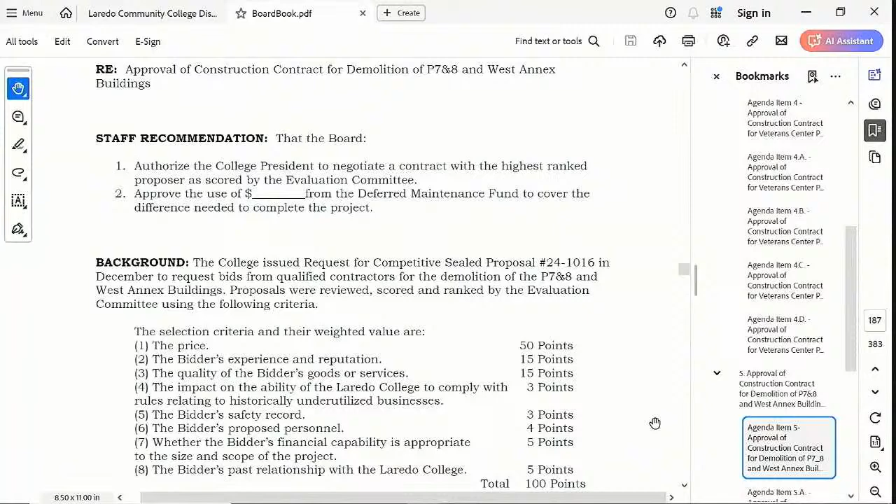In the agenda item, you have the criteria that was used to evaluate the proposals. The funding for the project, this is not a grant fund, this is a deferred maintenance project. We had initially budgeted 250,000 for the project, so both proposals came over that budget, so we will need to request additional funding from the deferred maintenance.

Depending on which one is selected, depending on which proposal is approved by the board.

Okay, but we will see those amounts tomorrow? Yes, yes, okay.

Any questions, Mr. Rangel? No, I was gonna ask about the funding, but Cesar actually covered it, thank you. Ms. Newsom? Dr. Ramirez? No, ma'am.

Thank you. Okay, then we'll move on to item number 6, construction projects update. Mr. Homer Paez and Mr. Huicho Tijerina.

Good evening, building committee members. I know some of you are new to the committee, so we normally come to you every 2 months with updates on all the projects going on at both campuses, the main Fort McIntosh and the South Campus. So today I'll go through all of the projects we currently have going on and give you a quick update, get you a little more familiar with everything on our drawing board right now.

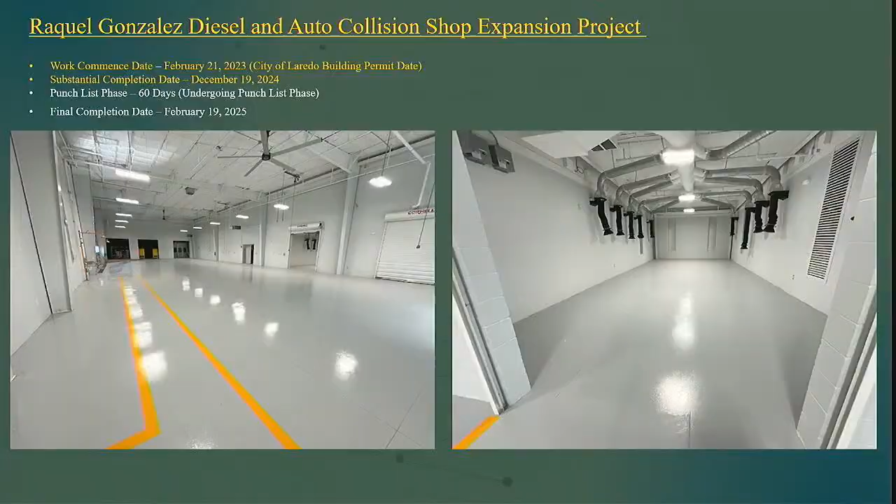Some of the new spaces showing you the overhead doors of both the auto collision and the diesel shop.

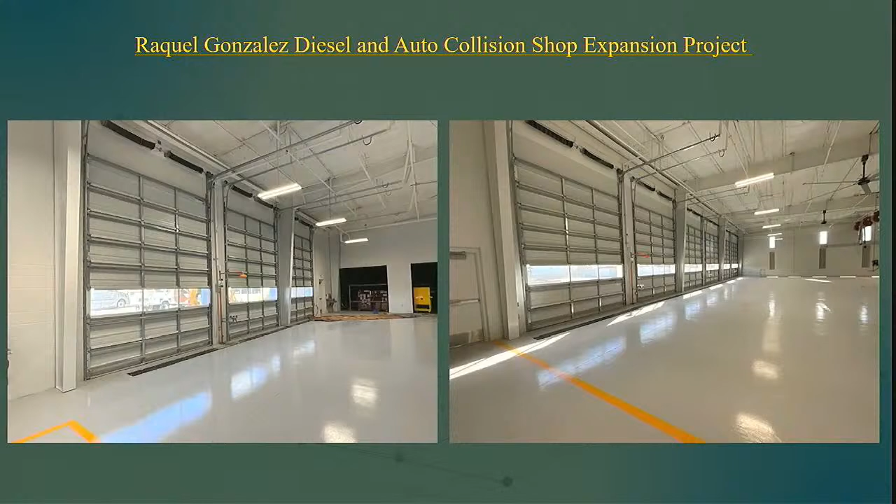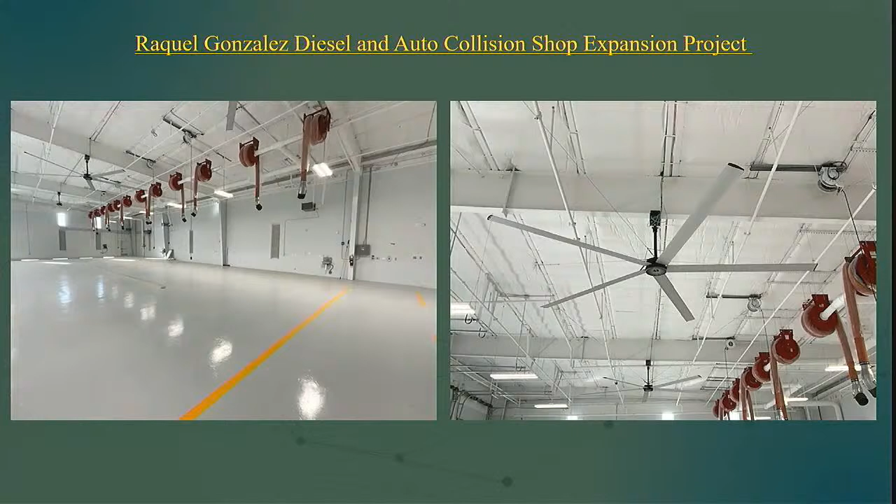Some of the services that have been installed as part of the scope of work: exhaust hoses and service reels for power, the large ceiling fans for air circulation. The floors were recently painted with epoxy finish as part of the scope of work.

So as you can see, some of these materials we've now used have become pretty standard for the college now. We're tending to stick to neutral colors, and this will become our standard for any renovations or new facilities that may come on board eventually later on.

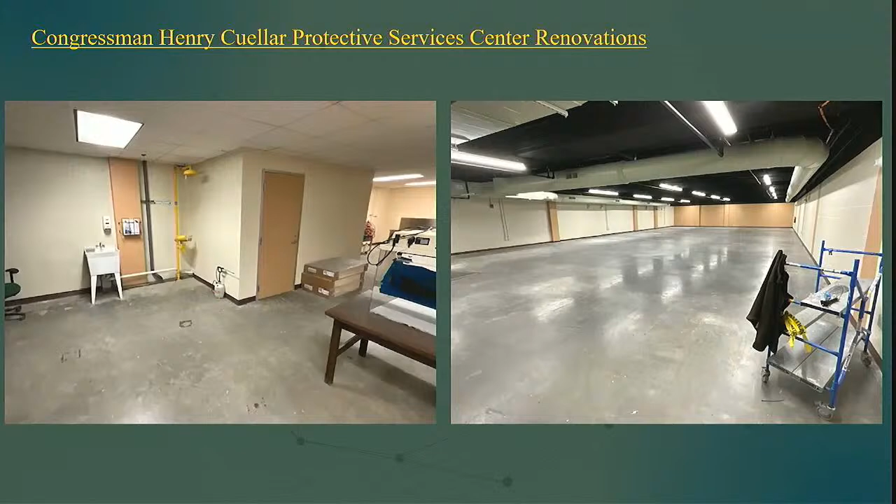These are some of the interior spaces that we renovated inside the building. A new office for the director of the program, with an adjacent conference room.

Here at Fort McIntosh, we have now completed the MFA HVAC chill water plant upgrade for three different facilities covering the LEAC, the MFA, and the VPA. Currently, the contractor is working on gathering all of his as-built documents and warranty documents to turn them over to the college and to plant facilities for their record.

We've had a few warranty items come up, and they've attended to all of them - all have been completed. The one remaining thing they're going to come back and check is the test and balance of the facility, to check the flow of air in each of these buildings. We'll have a final report included in the final closing documents.

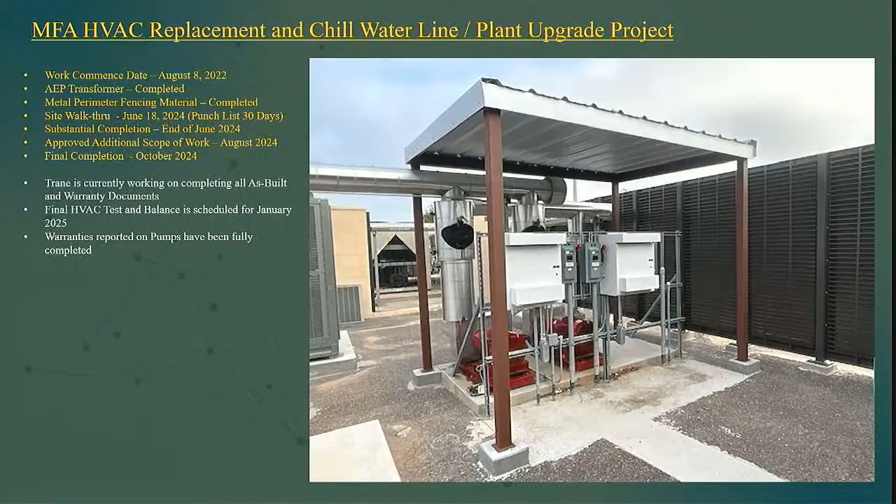The Lamar Bruni Vergara project, which we talked a little bit about the extension earlier - the formal letters are attached there for your viewing. If we do get the extension, we will have substantial completion on March 31st, and final completion on May 31st for this project.

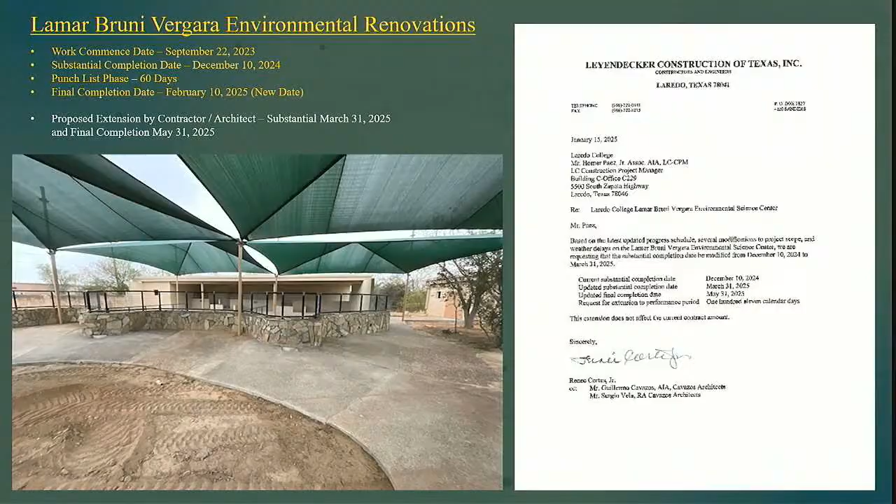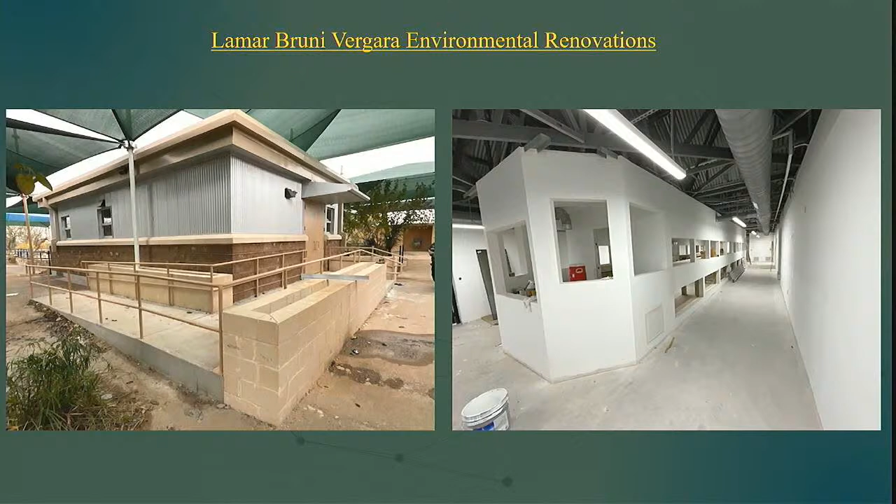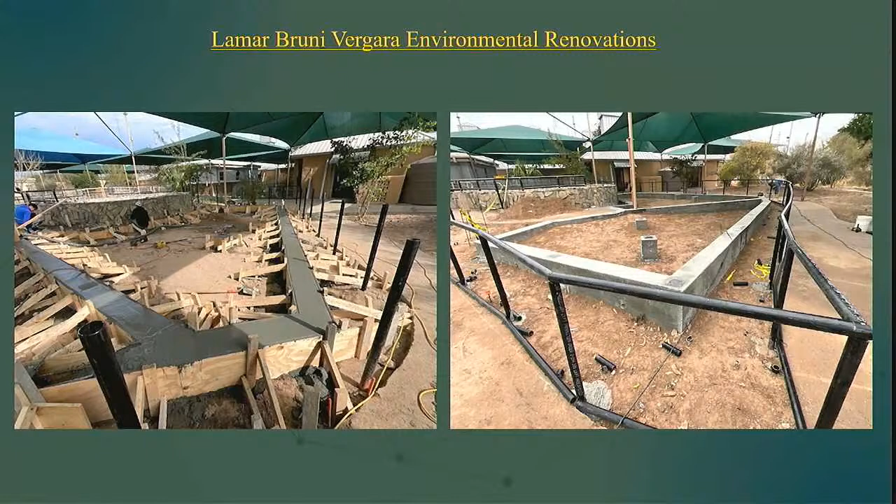Currently on site, they're doing a lot of welding for all the enclosed areas for the animals. They're doing the foundations to start picking up the cages that will hold the different animals housed here, and you can see some of the railing work going on as well.

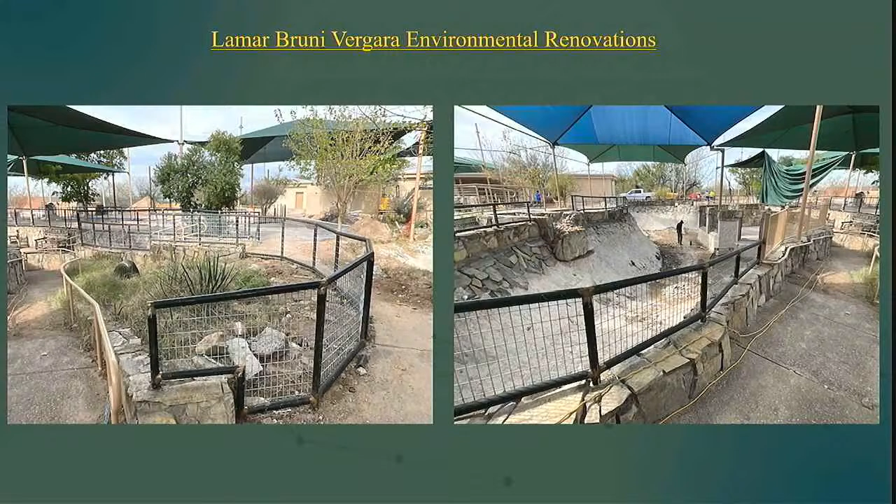This is some of the railing that's been finished, still pending to be cleaned, primed, and painted with the final color.

A little bit more work shown on the alligator enclosure and display area going on.

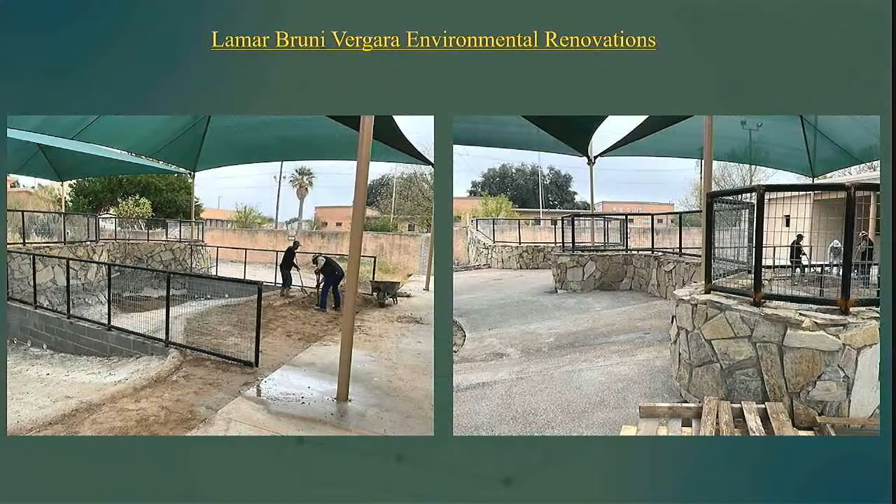The other project we have here at Fort McIntosh is the Arechiga facility, interior and exterior renovations. This job has been going on for several months now. The contractor has submitted a formal letter as well with the same dates - if approved, we'll reach substantial completion on March 31st and final completion on May 31st of this year.

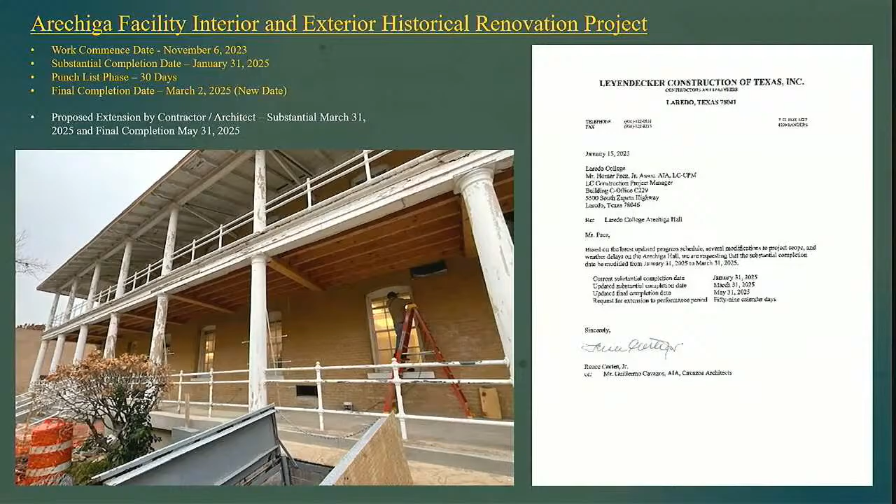Currently we have different trades working in this building - HVAC, plumbing, electrical - and we have other trades working on the suspended ceiling and wood floor refinishing, patching up and replacing some floors that were discovered to be rotten. That work is currently going on right now.

Some detail work on some of the large rooms - we tried to get the contractor to duplicate some of the existing ceiling treatments, and the architect worked very closely with all of us to reach that goal. I think we reached what we were looking for, and it should be really nice once it's fully completed.

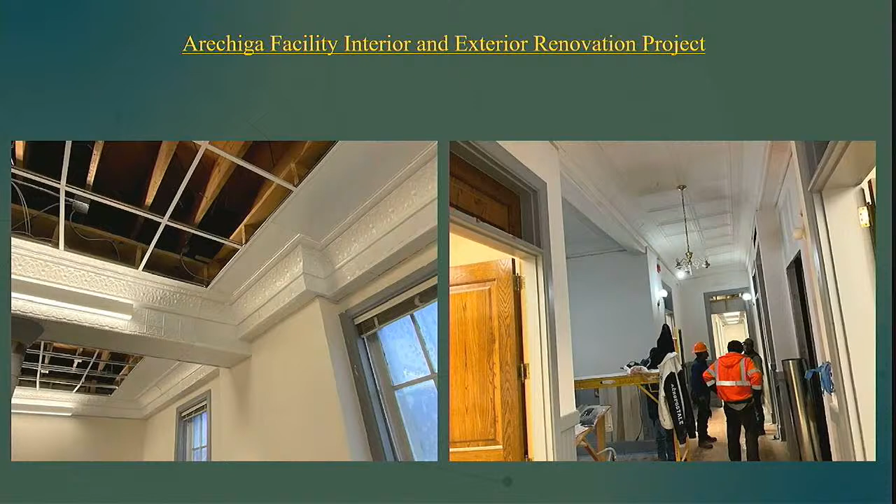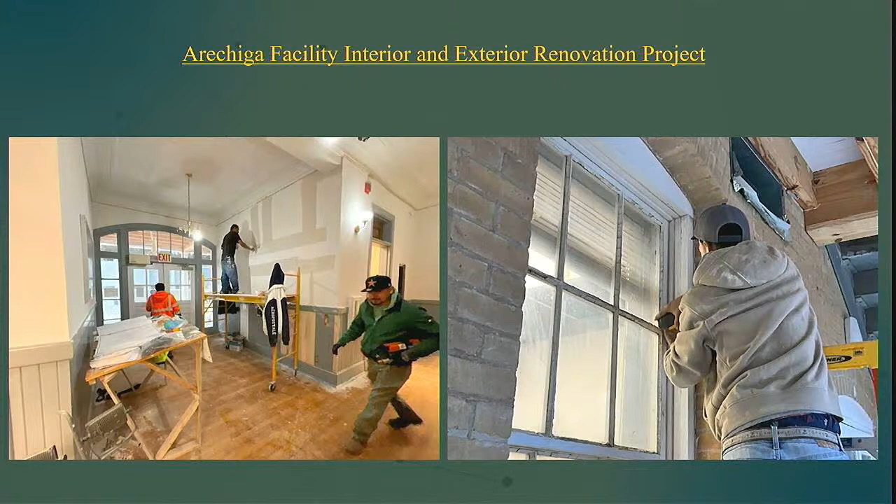Some of the labor work going on includes tape and float repair of some walls, and a picture of the gentleman working on the exterior windows. There were some guidelines included in the specs and requested by the historical commission for the windows, and that work is currently going on, so we have that trade also on the site.

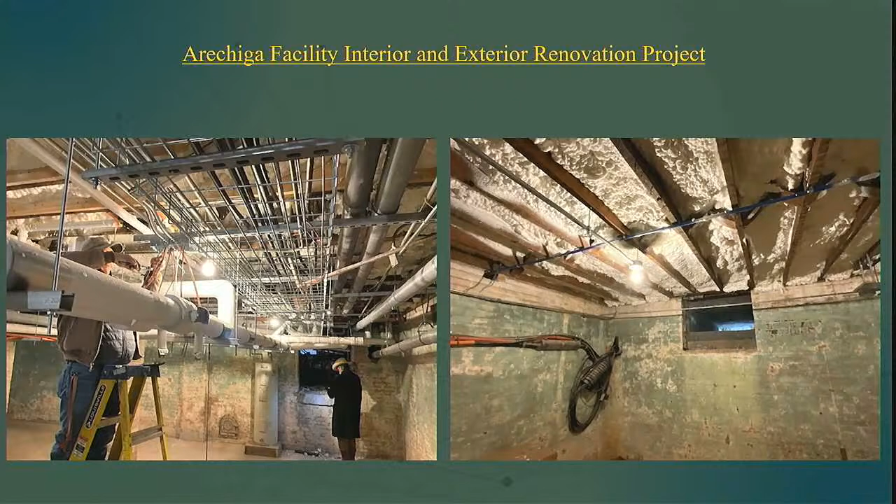We also have the Moore building currently going on. That's a covered structure out in the open courtyard. We do have a scheduled substantial completion date of July 2025, and then a final completion of September 2025 after we complete the punch list for this particular job.

Time-wise, we're doing pretty good on this job. I estimate if we stay on the same track, we may finish a little early. But we do have a lot of work that's going on in actual spaces that are being used by students, so that's kind of held us up a little bit, but the contractor is advancing pretty well on this job.

Final completion for all projects, does that mean we'll have a CO by that date? Yes, ma'am. By the time we reach final completion, normally the contractor will be working towards getting a CO for each of these jobs, and after all the inspections are reached, then the city has a final inspection.

That final inspection is done by the fire department. But my question is, when you say final completion, will you have the CO by that date, or is that when you're going to start submitting requests for approval? We've gotten the permits before and the CO, we've gotten it after.

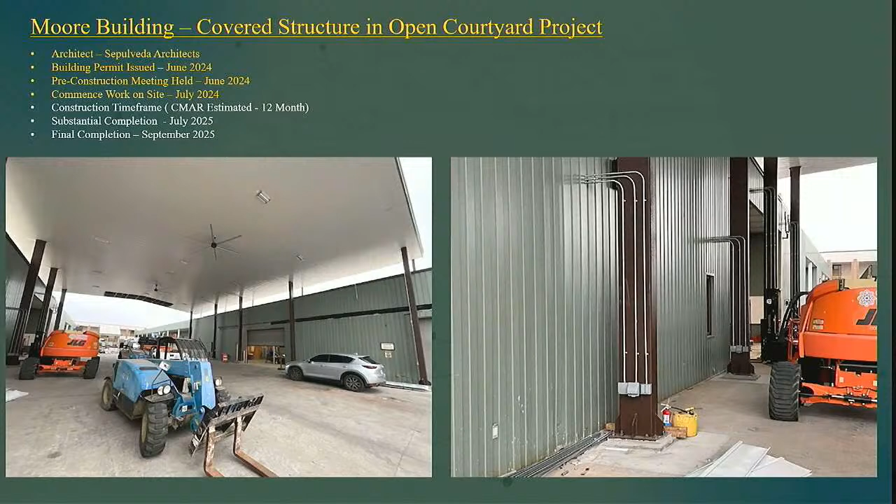For example, right now at the South Campus, we're going through that process, getting the CO for both the law enforcement and the diesel shop. The law enforcement is taking a little longer because we gave them additional scope, which were the restrooms, so we had to wait for the process of getting the CO. But on the diesel shop, it's something that we're already working on to try to get a CO already.

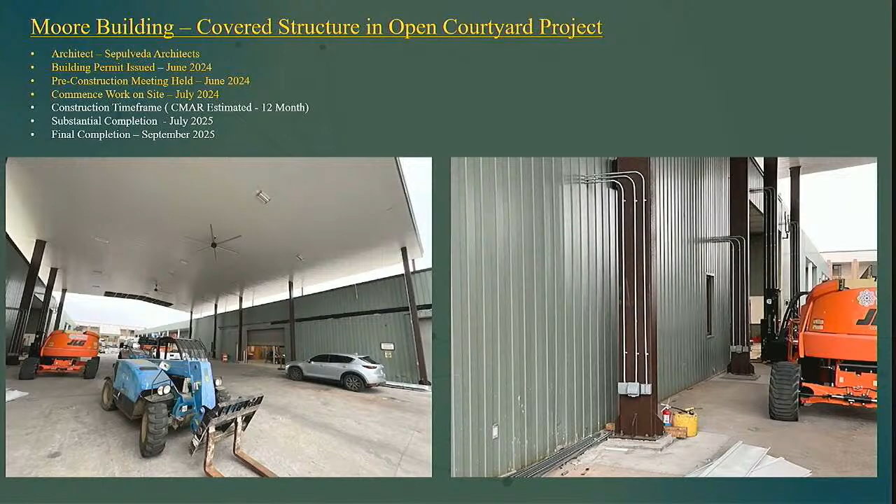Keep me posted, please. That's the first time I hear about it.

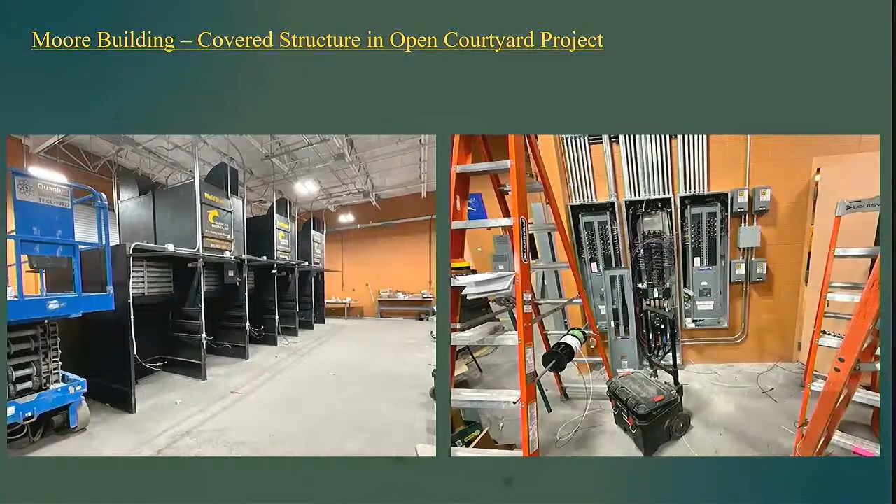So just more information on the Moore building. We relocated 12 welding shops, shown on the left-hand side. Those went into a new classroom area as part of the building that's already existing. And then here's a photograph of all the electrical upgrades that had to be done to support these welding stations.

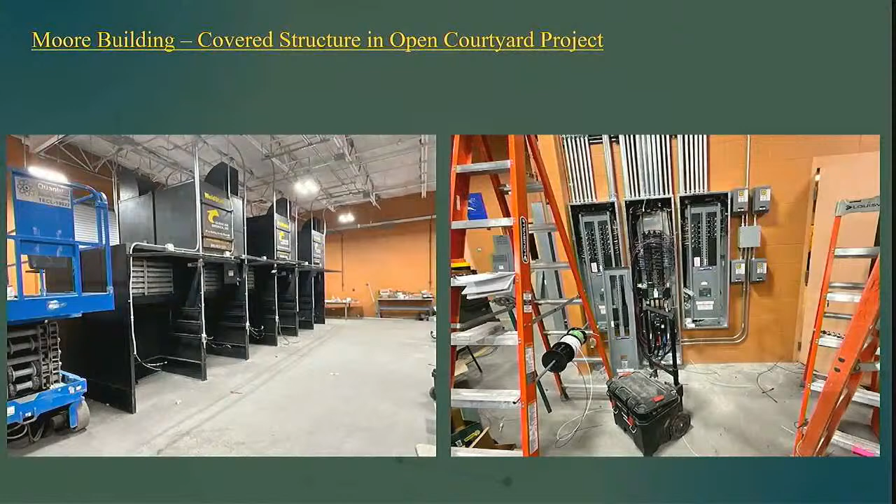I have a question on that. These welding stations, I noticed in a recent walkthrough that there were connections for the stations outside in the open area. Are these going to be rolled out? No, these stations are stationary, but they do have some mobile welding stations that they move around, especially during the summertime. That's one reason why we came up with putting that large cover, because the students were welding out in the sun in 100-degree weather. Now they'll be able to do that, and we have the fans.

So now we have electrical connections for those welding stations that they used to pull out to the open. Are those portable welding stations part of their equipment? Yeah, that's part of their equipment.

Dr. Ramirez: In our last walkthrough this morning, those fans are probably, I don't know how many feet up in the air. I doubt they're really going to provide a lot of circulation. Ideally, we would lower those fans and probably add another fan, because one, they're too small, and two, they're attached to the ceiling and nowhere near going to provide circulation. So do we know when the electric will be connected so we could test out those fans?

I believe we do have power to them already. They turned the lights on this morning, but they weren't able to turn the fans on. I don't know, we requested for them to turn them on. We did. Okay, I know that they're not working yet. Can we get them to see if we can turn them on, maybe before the end of the week?

We do have the architect, Robert Sepulveda, looking at the possibility of upgrading them to the ones like the diesel shop. As far as we know so far, according to the engineer, it requires the same electrical that is there now. So we don't have to do any upgrade on the electrical, it's just changing out the fan for a bigger one. So we are looking at that option.

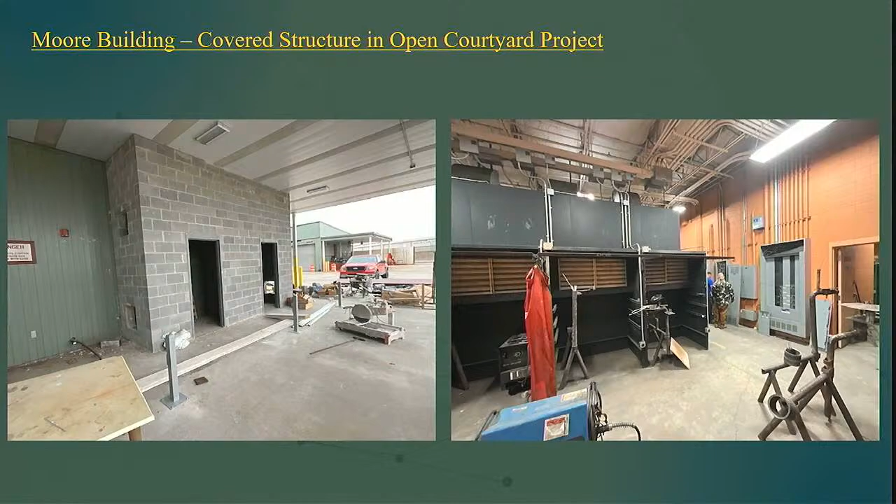And then we have the future LC Veterans Center also. If approved, we'll go ahead and fill in those dates after we get the contractor in line.

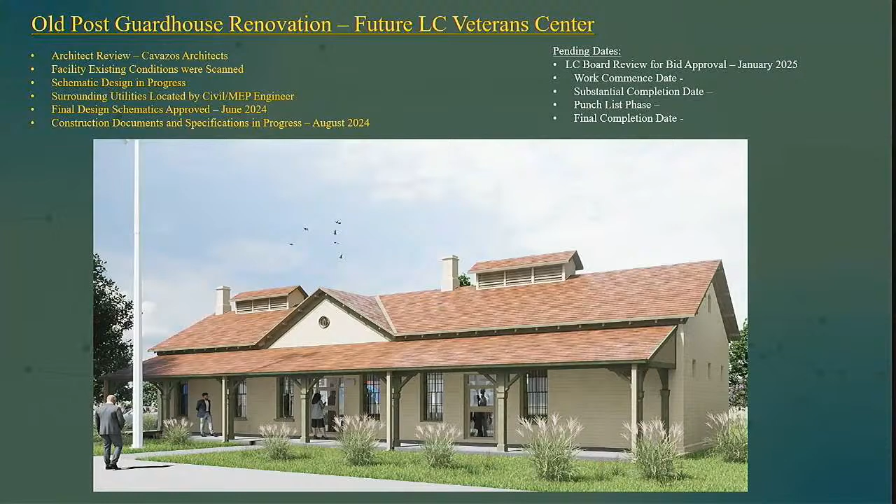Mr. Muir, I'm sorry, I can't remember right now, but is this item, the construction projects update, on the agenda for tomorrow? I believe that it is not. No, it's a committee item. I just think it would be nice to see these pictures before we vote on the items, for the board members who are not here today and who haven't seen them before. It's not on the agenda, but we can provide you pictures.

We can provide pictures to the board members of the proposals, right? But for the ones that are on the agenda, which would be the demolitions and this building, but not all the other updates on construction. Okay, that's fine. Thank you.

Mr. Angel, thank you Chair. Dr. Ramirez, items 4 and 5 are there, but I know Ms. Leando has a committee report. I'm wondering, can we have IT or staff submit them so she could flip to them as she's giving her report? Sure, that's a great idea. We'll send you the pictures. Okay, that'll work, and I'll make it short. Quick.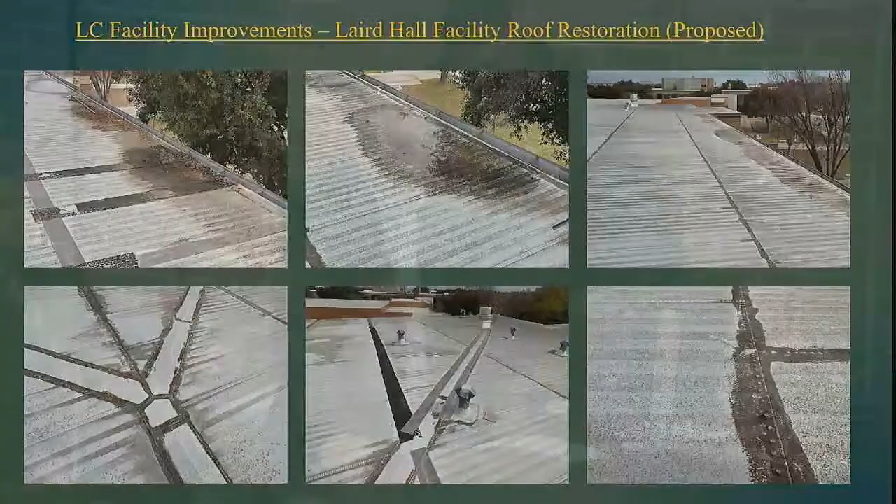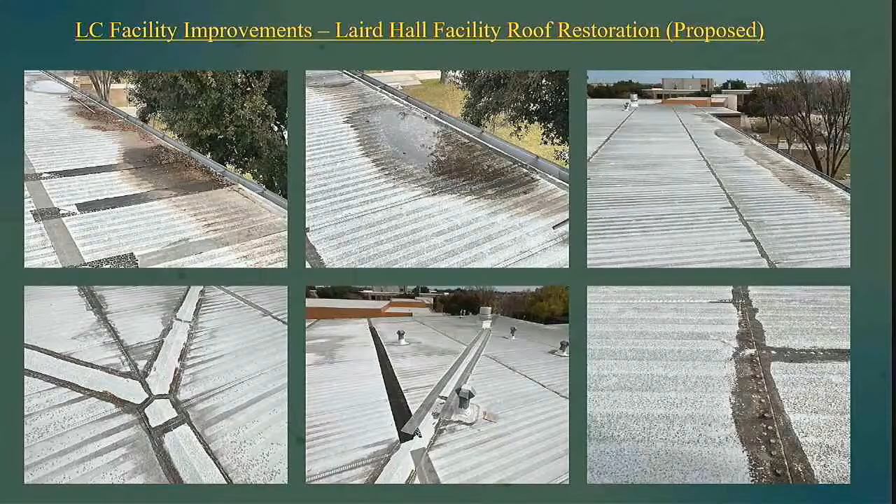I just want to note that while I was up there, I noticed the old section of the Yeary Library has this same system and is in the same condition. We should probably put that section of the Yeary Library on the list as well. That's my report, if you all have any questions.

Thank you very much, Mr. Duncan. I have a question, but it's tailored more to Dr. Ramirez, and probably Dr. Maricela and Dr. Heriberto. All these buildings we're expanding to bigger construction, are we already working on the curriculum base, correct me if I'm wrong, will the classes be larger, or are we going to have more additional classes added to the curriculum?

I'll let Maricela Rodriguez Tijerina, Provost and Vice President of Academic Affairs, answer, and I'll let Heriberto add if I missed anything. On diesel, we had 60 to 80 on a waiting period for a long time. Part of this, the curriculum already exists, we just needed the space. So now we're working on the added equipment we're going to have to order, as well as probably an added lab coordinator to help with the expansion.

In regards to welding, it already exists. It's a program that will start from 8 in the morning and last till 10 o'clock at night. Part of the problem, as Homer mentioned, is the ventilation. Now that they've fixed that, we also needed the outdoor space to do that. I am going to verify on the ceiling fans, by lowering them to what extent it doesn't interfere with the actual project, so I'll let the welding instructors identify the measurements of those ceiling fans. What else are we missing?

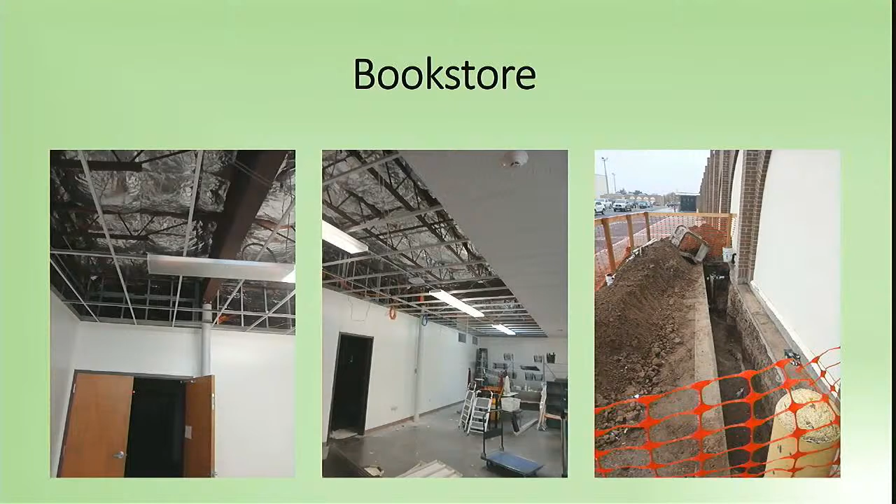I think we're changing the name on that—on the bookstore. Well, it's not going to be the bookstore, it'll probably be event services. On the De La Garza restrooms, we got one side done. I don't know if you've ever been in there, but one was pink, one was blue. We've gone neutral on all the colors. We've finished one bathroom and we're starting the second.

The Lerma Peña building, we've started changing out all the lights from regular lighting to LED lighting.

For the South Campus, the projects we have are fire panel upgrades, the retrofit for the LED lighting, power washing the windows and walls yearly, sealing all the windows and repairs, interior wall paint, floor tile, and we're installing the LVT tile now, again in neutral colors.

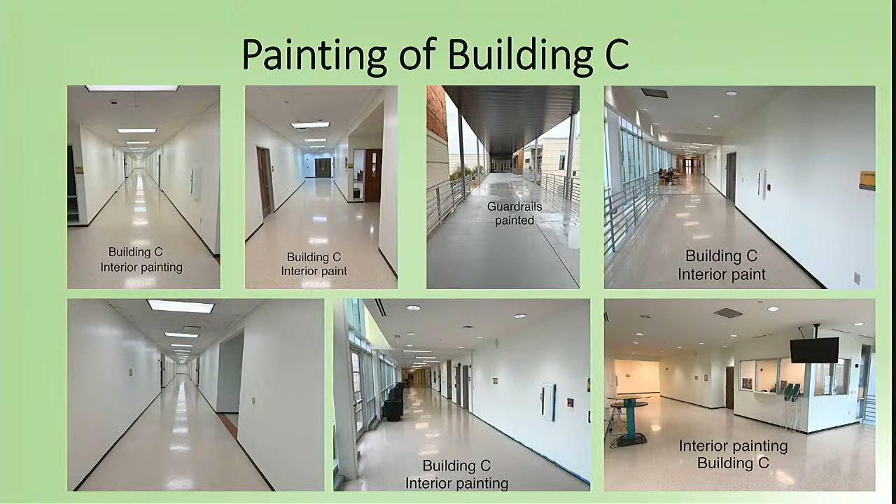These are some of the buildings—as you can see, the guys are working. Building C, interior paint, the guardrails—all neutral colors again. We're painting the staircases gray.

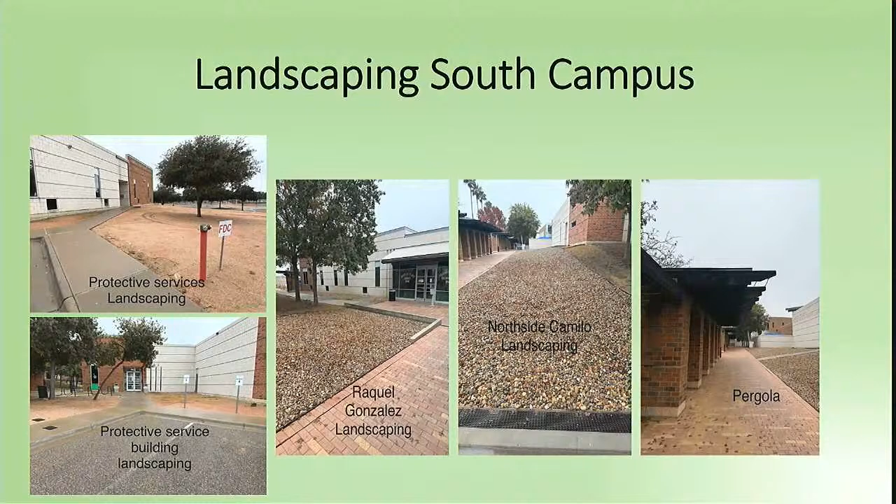On protective services, we're doing the landscape there. As you can see on the north side, landscaping—we're going with river rock as opposed to granite, at the Raquel Gonzalez landscaping as well. We're getting that ready for when we have the ribbon cutting, so we'll be ready to go when that comes about.

And that's it—those are our projects that we work on a daily basis with our in-house plumbers, maintenance crews, electricians, and HVAC guys. That's great.

Thank you. I think you all are doing a lot of great things, and of course this helps prevent those buildings from continuing to deteriorate, so it makes their lifespan longer. Thank you all for what you're doing.